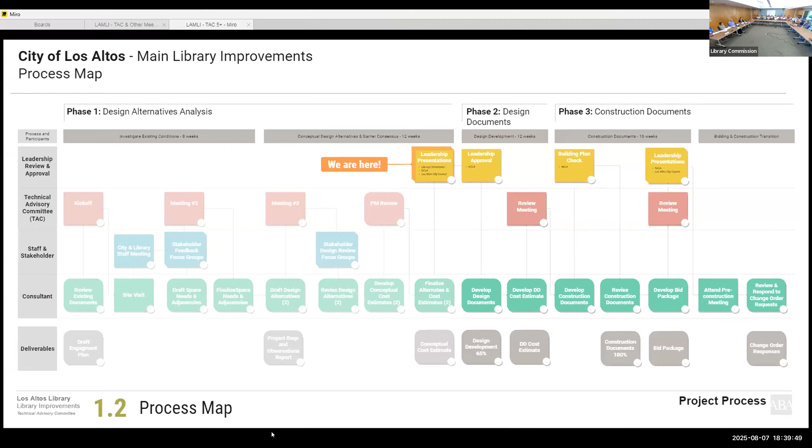This is another way to show that same process with more of a 30,000-foot view. This is our process map that we shared last time, just showing where we are in the process. I don't expect everybody to read all the text on that slide. This is strictly indicating that we're getting to a point where we're looking to conclude the first phase, which is a conceptual design phase, and then start to look ahead into phase 2 and 3, which would establish additional detail behind the design. So that's where we are tonight, on that yellow box at the top.

So let's jump now to the next. And I think we're going to talk about the additional outreach and input we received. You want to walk us through? Okay, good evening everybody, can you hear me? Do I have it close enough? Yeah, right, I'm gonna do this.

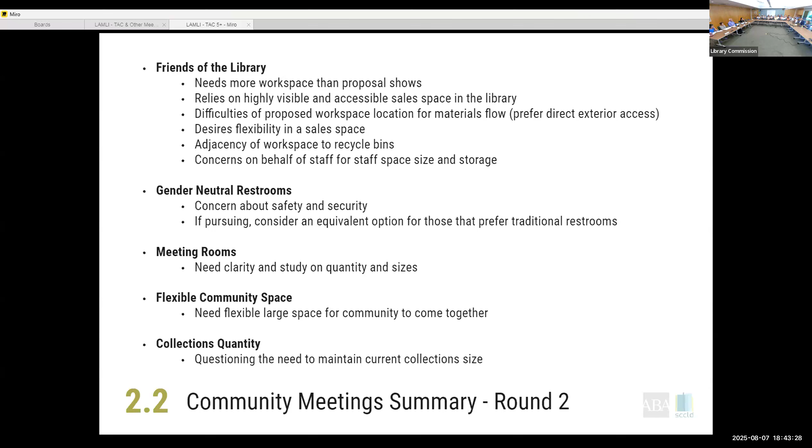If I may pause just for a second. Commissioner Carter, are you able to hear? Okay, just make sure you can. Can you hear me? Bring it closer, I feel like I'm really loud. It's okay. No, sorry to interrupt you. I just want to make sure everybody can hear.

Continuing on staff workspace, we went over this with the library supervisors to really get their feedback, because we didn't go over that with the rest of the community. We reviewed 3 different layout options for staff and received input from multiple voices, including the children's librarian, supervisor, and supervising librarian for adult and teen services. We reviewed the automated materials handling machine, which is when you put your books in the return and that machine takes them back into the workspace. We also covered their workflow and circulation, staff lounge and restrooms, quantity of offices needed, sizes and quantities of workstations, individual task space, group space for tasks and working together on projects, layout and sorting space, and cart and storage requirements.

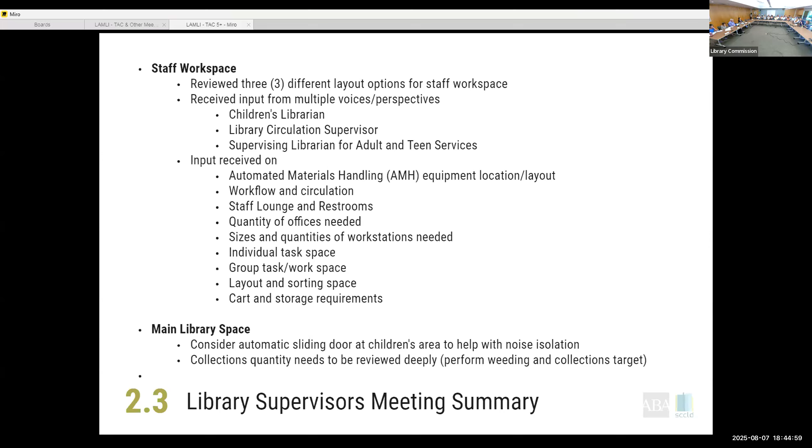We went through a couple of iterations, reviewed them with the library team, and came to the conclusion of what you'll see in the plans tonight. We also talked about main library space, considering automated sliding doors in the children's area to help with noise, and talked about collections quantity needing to be reviewed, performing some weeding and collections targets.

So this is a really high level summary of what we heard when we did the community outreach session out here in the main area of the library.

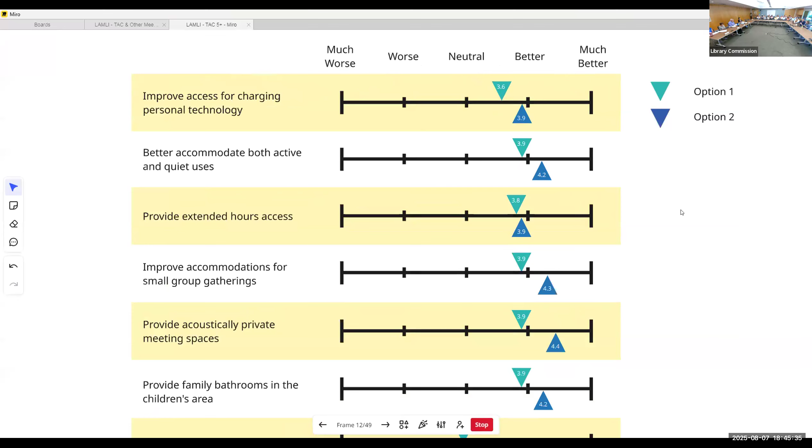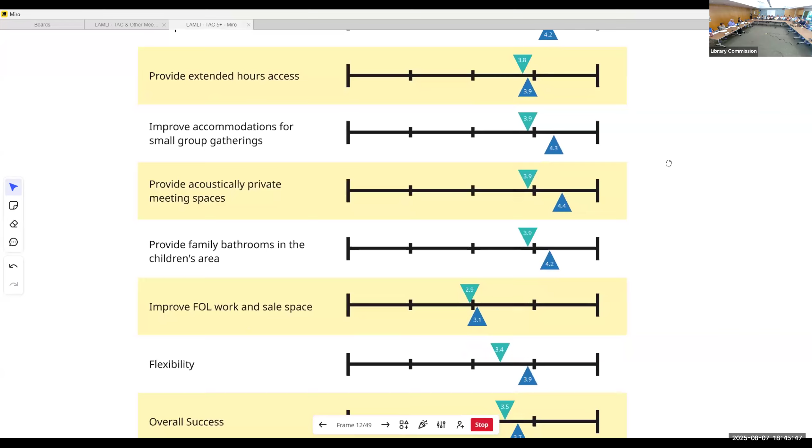I can't super duper multitask, so what you'll notice is option 1 is noted in the teal color, and option 2 is noted in the blue color. We showed 2 different options when we talked with the community, and you can see basically how they scored. They're very, very similar, with most of them on the neutral to better or much better side. The only one that was below that was the Friends of the Library work and sale space. You can see where all of those landed from the community, based on what we heard.

Sorry, is there a sound? Yeah, I was trying to turn the volume up. Now I feel like I heard it change. Yeah, okay. No, so what should it— lower? Yeah, you're hearing an echo. Yeah, just this microphone noise. Let me turn it, yeah.

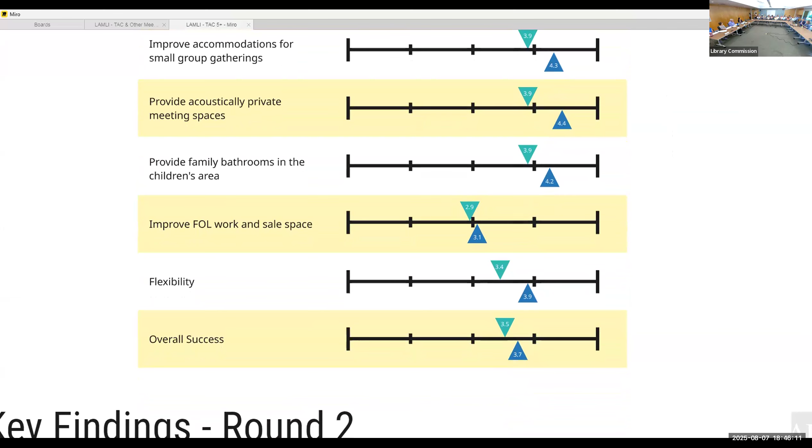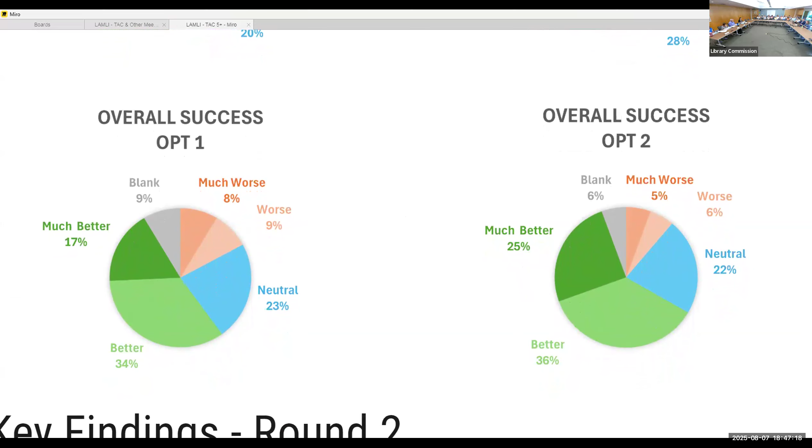And then overall success for option 1 and option 2: you can see that in option 1, at least half of the respondents said it was either much better or better, and a pretty large chunk said it was neutral. In option 2, an even larger amount of people said it was much better or better, with a pretty large chunk being neutral. So in general, these are pretty positive responses to both of the options we shared in that public outreach.

Okay, we take all of that information that we hear from everybody, all those Post-it notes, we group them together by topics, and we picked a couple of the comments that cover across the board to share in the meetings that we've had with the TAC and with you. So there was both support for shared non-gendered restrooms and there was opposition to it.

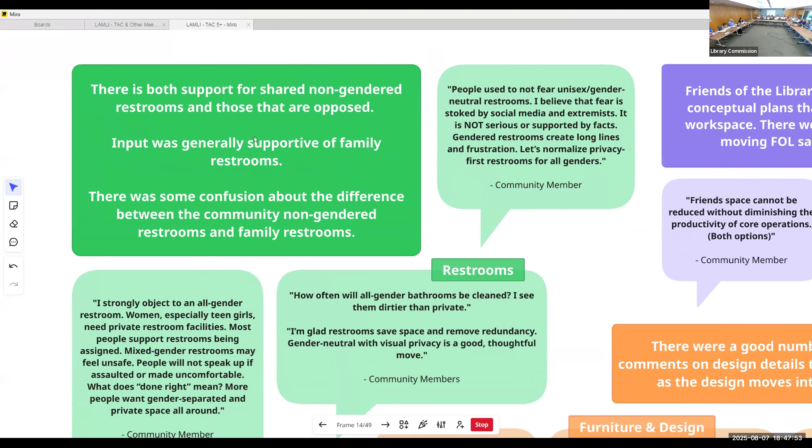Input was generally supportive of family restrooms. There was some confusion about the difference between the community non-gendered restrooms and family restrooms and what each of those meant. I'm not going to read all of these comments for you guys because you were able to look at this ahead of time. You can also go back and look at it afterwards.

And then there were a good number of community comments on design details that we're not yet considering because we're not into that phase, but we definitely heard all of this from everybody and we've got that information cataloged so that as we move into the next phase of design, we can go back and look at these and consider these comments.

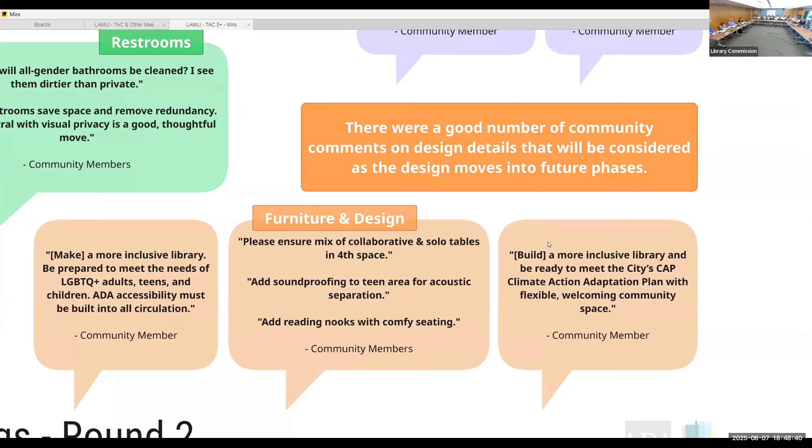And then lastly, there was a little bit of confusion, I think, about the passport office being in the library. I have a feeling some people didn't know that it exists there now and might have thought we were adding it versus just relocating it.

Support was mixed regarding the extended hours space, with some concerns about wasted space, and others wanted to be sure that it's welcoming for people to gather and interact and should even be larger than was proposed. And there was an appreciation for providing quiet study and meeting rooms, while others that don't use something like that didn't think it was necessary.

And then you can see there were some comments about the design, including the dividing wall, and there were some comments about the meeting spaces that were both positive and that didn't think it was necessary.

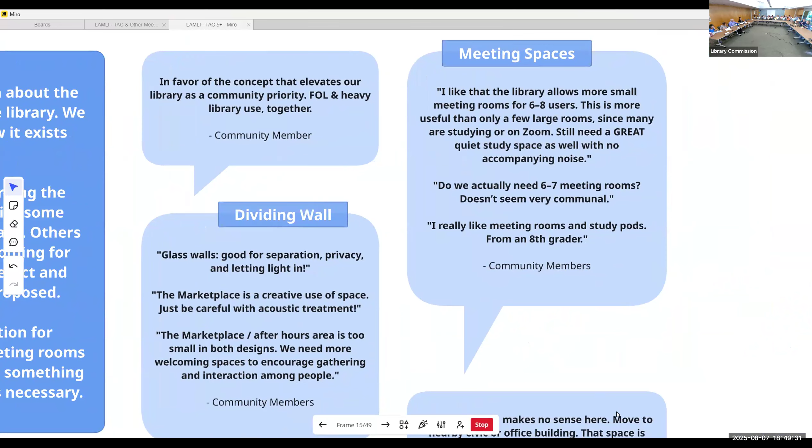And yeah, the passport office makes no sense here. So again, you can go through and read these comments on your own. I'm not going to take up all of our time to read all of those to you, but that's a synopsis of what we heard from the community.

So, to remind us. Yeah, I can do this part. So,

One of the things coming out of that additional input, I want to acknowledge that it's very difficult to convey all of the input that we received on a few slides, right? So Amy just went through the highlights, and one of our jobs is to try to pull out the things from a huge array of input and really pull out the key themes. And so that's what Amy just reviewed with you all. In addition to the key themes, there are design goals.

These goals were the same goals we reviewed last time when we were here, so these should look familiar if you recall. But again, when we talk about design, we can judge design based on a set of criteria. So design is successful only if it hits the goals that we're trying to achieve. These are the goals that we had set out through the input we received. And as we go through the final conceptual design draft today, these are the goals that I want everybody to keep in mind as we look at these plans and renderings. So I won't necessarily read all of them, but I just wanted to give that context again.

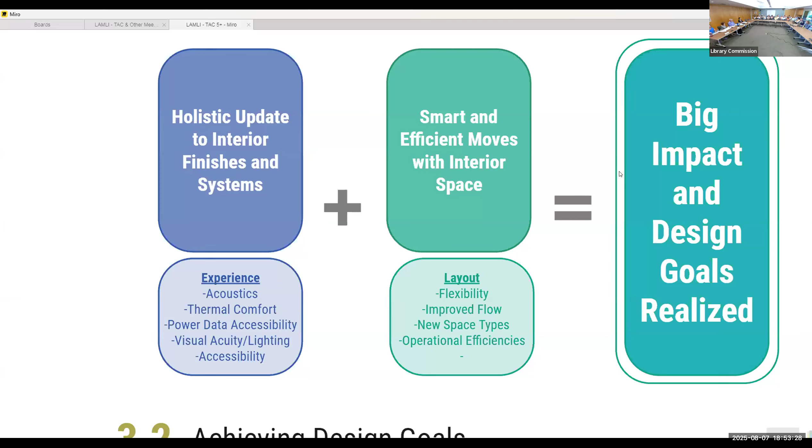So what you see on paper is one thing, but there's a lot behind that. I wanted to point out that these two things combined result in big impact and in the design goals being realized. So with that context, let's jump to the next slide.

One of the things I'll speak to is that you have an incredible building here. We need to understand deeply how this building is performing and where it's falling short. So when we started this process, we did what we call a facility assessment. This assessment is important because it provides the foundation for everything that we do, and we wanted to review some of the key takeaways from it this evening.

This assessment really allows us as a design team, and there's a whole lot of people behind Amy and I here tonight, to look at ways to improve all of those things I mentioned, down to the mechanical units, looking at full electrification of the building. There's a lot of components to this.

Some of the key takeaways of your building, of your space, are that this building has great structural bones. Structurally, there's nothing wrong with this building. That's a key indicator that this is a prime opportunity to renovate and improve what's here, because the bones are good.

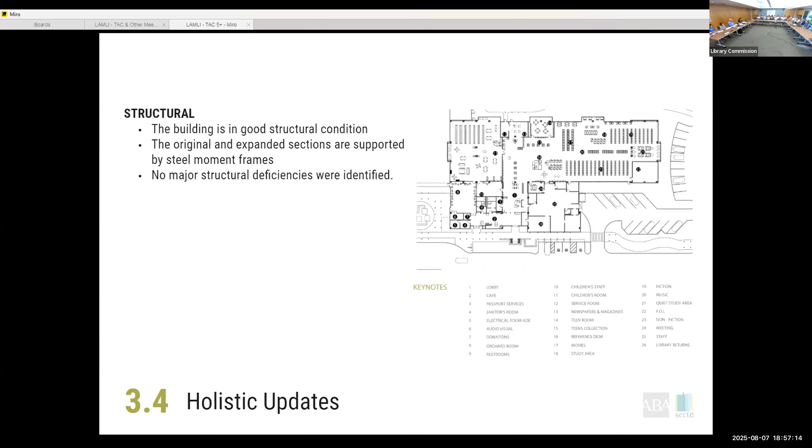Let's talk about mechanical and plumbing quickly. Many of us never see the guts of the building, but the guts are what give you the great thermal experience, the acoustical experience, and many other things. You have existing HVAC and plumbing systems that are functioning but aging, as I mentioned. Several mechanical components, such as the chilled and hot water pumps, are near the end of their life, so these are systems prime for consideration to replace as part of this upgrade.

So you can see here some photos. If any of you have been to the mechanical yard, just right behind the children's area here, these are some of the photos from that yard. Our engineering team went out there, opened things up, and looked at this to understand how it's functioning.

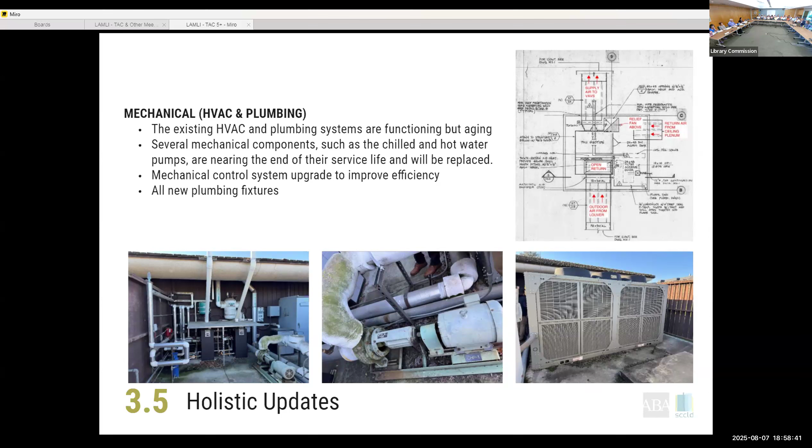The plumbing fixtures are also in need of some update, along with the control system. In today's world, there are a lot of controls inside these systems that allow us to integrate lighting, HVAC, and other things to achieve the best energy performance we can. Right now, your controls are lacking, so that's going to be another component of this.

Electrical is comprised of lighting, power, and to a certain extent, data backbone and telecom. Right now, you need better lighting that's more highly efficient, along with lighting controls to go with that. In addition, especially with today's generations, people go where the power is. So there's a definite need to look at how power can be provided more flexibly throughout the space. That's another key element here.

And then there are life safety issues—egress lighting, fire alarm safety devices that need upgrades. These components are really critical in the case of an emergency, to have these functioning. This is all part of what we'd be doing as this improvement moves forward, improving all these systems.

Electrification is a big topic, something we as designers are constantly grappling with in all of our work. There's sometimes an initial cost to electrification, but with the latest codes and the way things are trending, there's a big push to move away from natural gas. We've considered that as part of this project, and we've looked at ways to fully electrify this building and account for the costs of doing that. We'll go through that later in more detail, but I wanted to mention it as another component of what we're thinking about.

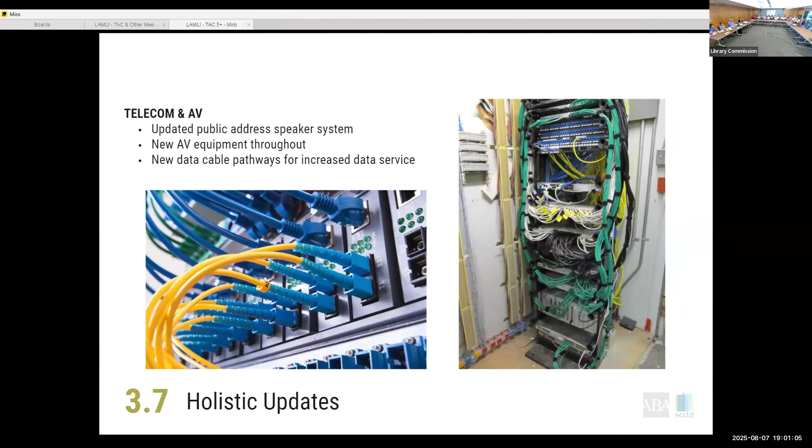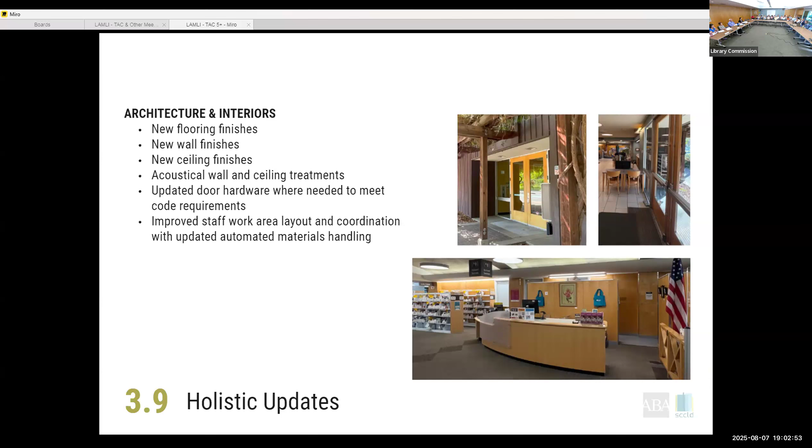Lastly, architecture and interiors. This is a big category because it includes all the things you all get to experience visually and get to touch and interact with—the materials, the finishes, the ceiling treatments, the doors, the hardware. All of these things are really important. We're going to be taking cues on how to do these things based on the current architecture you have. You have a building designed by a Bay tradition architect, Ernest Kump, and there's a lot of history behind this building. So when we select finishes and look at ways to solve the interior details, we'll be taking cues from the heritage of this building, if that makes sense.

With that, I'm going to hand this over to Amy. This is your existing floor plan of the building. To orient everybody, Amy, can you draw a circle where we're sitting right now? So we're in the community room. Many of you are very familiar with this building, so I probably don't need to tell you where we are, but we're about to go through a design that looks to improve this existing condition. I want everybody to see what it looks like today from a bird's eye view, and Amy's going to walk us through how we're looking to improve the layout and functionality of your space.

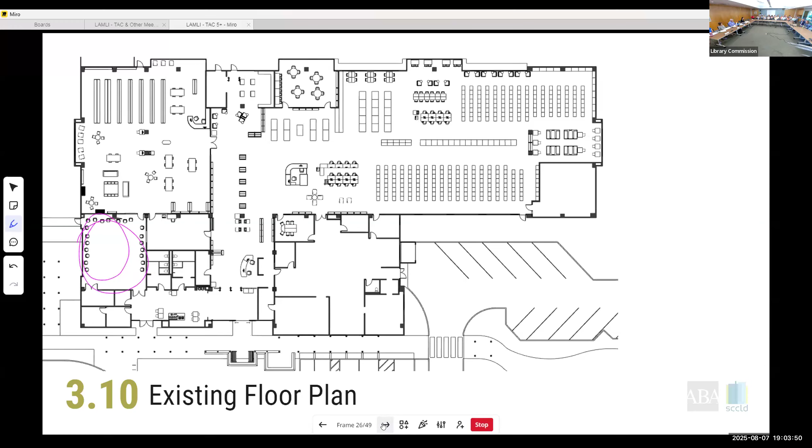So I know there's a lot on this slide.

So it should look pretty familiar to you all. There's a lot that is similar, but there are some key differences you will notice that are based on the feedback we got from all of you and from the community. So I will go through this with you.

Again, here's your entrances. This is your main entrance from parking out front. We're right here in the community room, and this is the entrance that comes off of the orchard. So key design elements: we still have the full height glass wall that divides the active areas and the quiet areas of the library. This thing is a workhorse. It's going to do a lot for us in the space to answer some of the needs that we heard about.

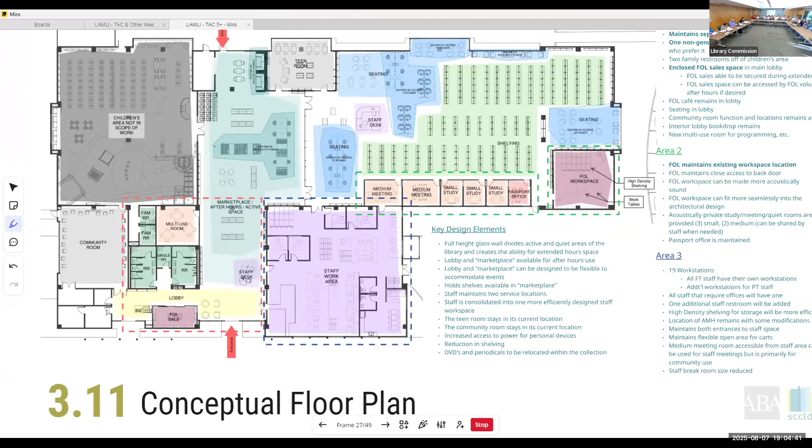I'm just reading from that, so I don't want to lose it. That's going to create a lobby and marketplace. I know there was some concern about that name. It's a common term used in library design, so don't think of it as a retail space. It's just a common word used in library design.

That marketplace is available for after hours use and extended hours use, and it can be designed to be flexible to accommodate different types of events. We have not designed the furniture for this space yet. Remember, we're looking at this as a conceptual design, so the furniture is not set. But in future phases of the project that Jason showed you earlier, the furniture comes later, and we can work with the library, the district, and the city to come up with furniture that's as flexible as needed. Holds shelves are available in the marketplace.

Staff maintains 2 service locations as they do now. Staff is consolidated into a single area that is more efficiently designed. That staff workspace is this big purple area. The teen room stays in its current location. The community room stays in its current location. There will be increased access to power for personal devices, which Jason talked about briefly. There is a plan for a reduction in shelving. That reduction has not been decided on yet, but there is going to be some reduction.

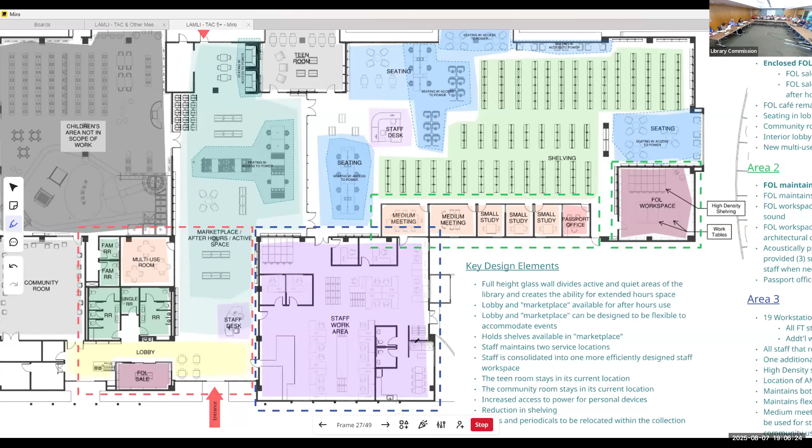Over here so I can see. So we've got this broken up into some areas where there were a lot of key comments. The first area is circled, or has a dashed red line around it. This is sort of the restroom core, what we might call it. It includes the lobby space right as you walk in that door, the restrooms, family restrooms accessible just from the children's area, and a new space you'll notice called a multi-use room.

I'm going to try to get this maximized so I can read that and you guys can see it. So we do maintain separate men's and women's restrooms here in this plan. There is one non-gendered single restroom off of the main lobby for those who prefer it.

That way we can zoom in. And then we do have the 2 family restrooms off of the children's area here. There's some lag with the screen, for some reason it doesn't catch up. There we go. So yeah, 2 family restrooms here.

And then you'll notice here in the lobby is the Friends of the Library sales space in an enclosed space. We'll show you some 3D images later of how that could potentially look. Remember, we're conceptual right now. So it allows for that space to be secured during extended hours. It could also be accessed by Friends of the Library volunteers after hours if desired.

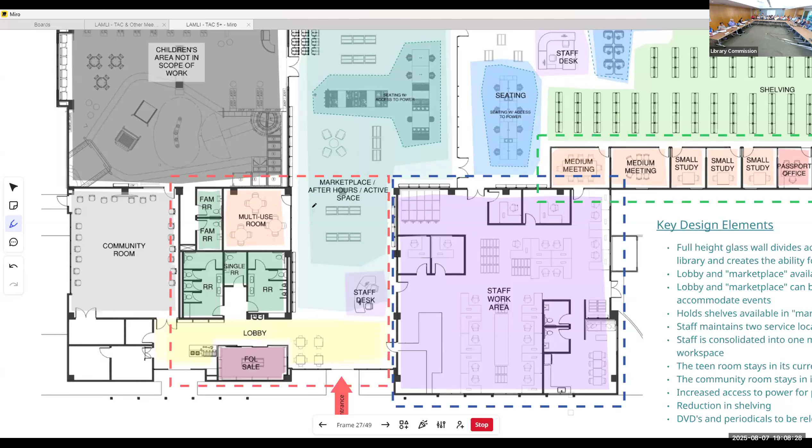The cafe remains in the lobby. There is still seating in the lobby because we know that is used every day by caregivers. Community room function and location remains as is. The interior lobby book drop remains, and there is this new multi-use room that can be used by staff, by library guests, and can be booked in advance. It's a really versatile room, kind of a workhorse.

So then here in this green section, it includes this area here, the Friends of the Library workspace. Give it one second, sorry, it has to transition to catch up.

We heard a lot that the preference would be, at least if not to make the Friends of the Library workspace smaller, to do no harm and keep it at least in the location it is in. So it is still in its current location. The size and shape is a little bit different. We'll talk about this later, in order for it to work well with the architecture and the hip that is in the ceiling, but you can see it is roughly about the same size.

It maintains the access to the back door that you have now. We can make it more acoustically sound so that you guys can talk at a normal level in there, and people sitting out here in the quiet area aren't disturbed. Again, it can fit more seamlessly into the architecture.

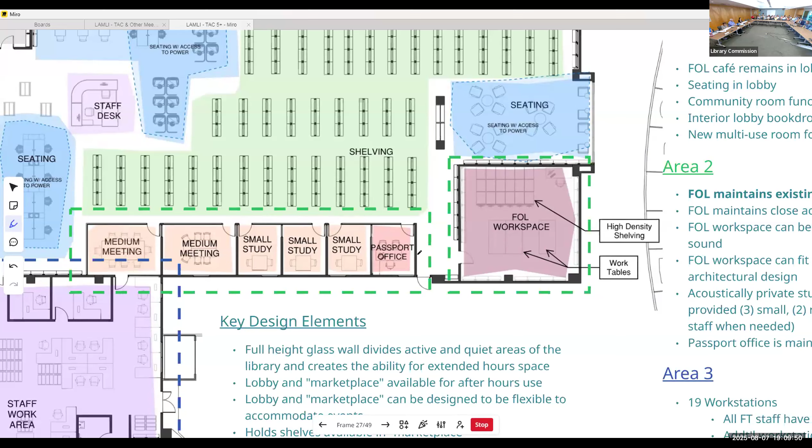We also have this row of small study rooms and/or meeting rooms. There are 3 small ones and 2 medium ones. One nice thing is that this one can be used by staff directly from the staff room. And again, we maintain the passport office.

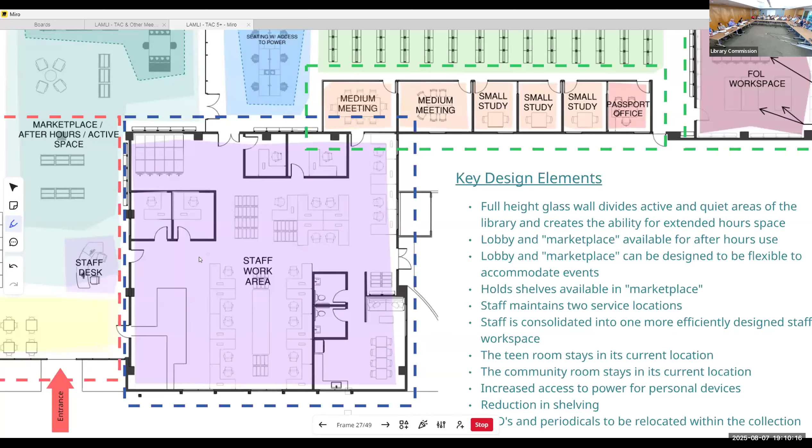Area 3 is the staff room, which most of you won't experience, but you should be aware of the improvements we've made there. We've maintained 19 workstations, which is what we were told is required. All full-time staff have their own workstations, with additional workstations for part-time staff. Everybody that requires an office will have one, nobody has to share. One thing we heard from staff is that they would really like a second restroom, which we were able to accommodate.

We are utilizing high-density shelving for storage in this plan, which makes it a lot more efficient, and that was really well received by the library staff.

The location of the AMH remains with some modifications, so there shouldn't be any changes to where the book drops are, on the interior or exterior of the building. They still maintain 2 entrances to their staff space, and they have a flexible open area for carts. Again, they have that meeting room they can access from the staff area when needed. Their staff break room size has been reduced but the functions remain, and they got that extra restroom. So that's a lot of information quickly, but you guys have seen this before, so it shouldn't be completely new.

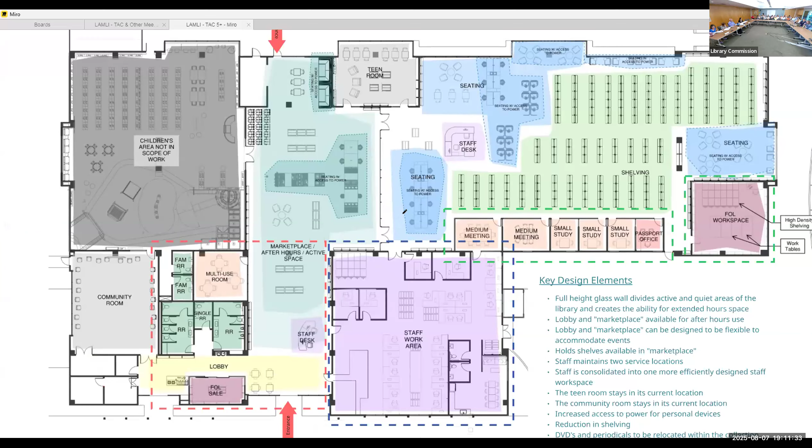I'll just highlight real quick, the green area shows the shelving. We're going to talk about the shelving in a bit on another slide. Go ahead to the next one.

I wanted to talk briefly about some potential flexibility for the marketplace. Right now you're seeing it here with larger furniture that allows for power access, where it's drawn from one location but stretched out so more people can access power from one piece of furniture. That's something that would not be as flexible and wouldn't move around as easily.

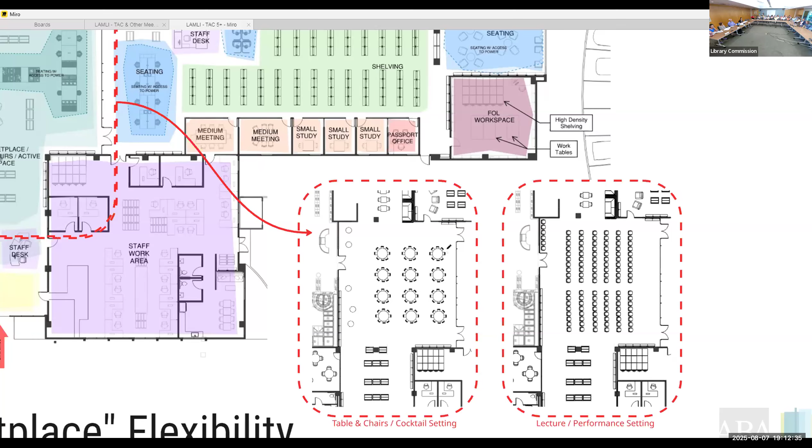Again, furniture is going to come down the road in another phase. We can design this to be as flexible as possible, so furniture can move out of the way. You could set it up for, say, a performance, a poetry reading, or a guest lecture. So there's the ability to use this space almost like you would use the community room, allowing for additional flexible space within the library. Those are just a couple of ways it could be set up.

If I may, I just wanted to add two quick items. I'm going to go back one step.

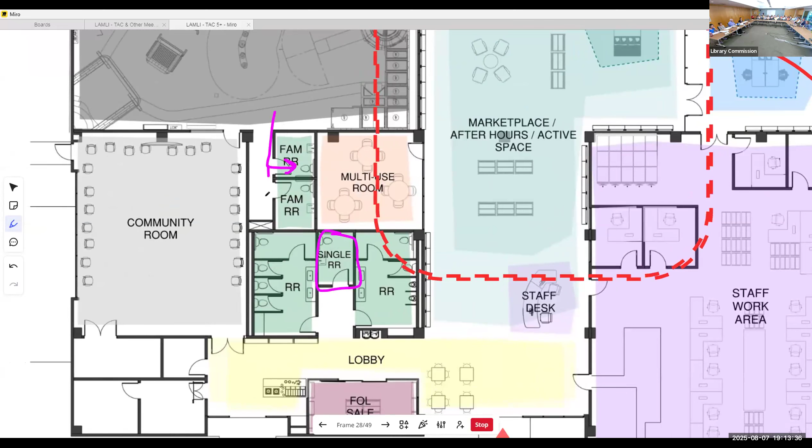That's okay, that works. I think the big takeaways here are restrooms. I wanted to point out on this plan, these are gendered restrooms, male and female. We also have the option, in the spot between the two restrooms, to consider a single unit restroom that could be considered all-gender, since you'd have one occupant, male or female. We also have the two family restrooms. So from a restroom perspective, this is a much different plan than what you saw last time. I just wanted to point out the big changes real quick.

This is a significant change from where we were. We've coordinated closely with the team developing the improvements for the children's space. You guys have a great children's improvements plan happening right now across the system, and we've been coordinating with that team so we can include access directly from children's to the family restrooms. We have two family restrooms, which I think will be a nice amenity.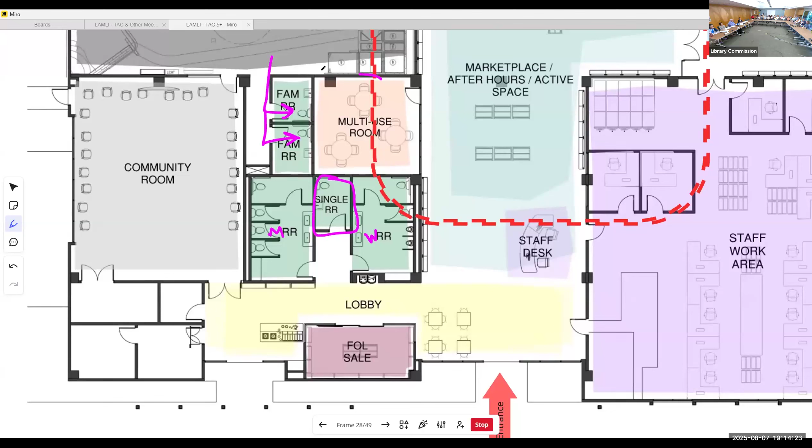I wanted to point out one other thing about this plan, the multi-use room. Amy mentioned this—we heard last time that we don't just need small meeting spaces, we need a variety of meeting spaces, and we need to be smart about how many we have, since you have great amenities at the community center too for meeting space. The multi-use room becomes what I'll call a large flexible meeting space, and then you have two mediums and a few smalls. So we were able to look at a variety without heavily impacting collections and other aspects of the library space. The last thing I wanted to point out on the plan, if you could zoom all the way out.

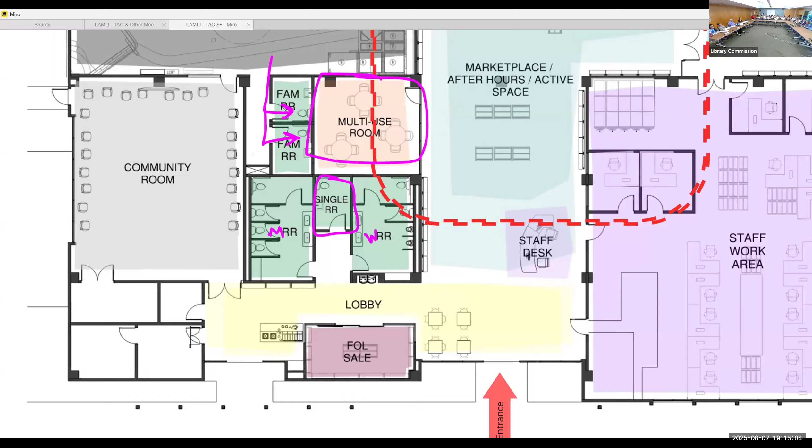For the workspace, you all know, I know there's many Friends members here tonight, that workspace is where you currently work out of. We had an opportunity to go see on a couple of occasions how that process works on a day-to-day basis. And we also know there's the sales component of what you do, which is very important. So this gets us the same amount of space you have now, but we're able to acoustically separate it. We'll show you in a view how that works, because respecting the architecture and the interior space is important. Right now, the Friends of the Library workspace has partial height walls and a big brace that isn't complementary to the space, and it also doesn't provide acoustical separation.

I'll pause for a second, Amy, if you have anything else. Thank you. I wanted to add that right now we're showing a conceptual idea for how this could be set up.

Obviously, in the future it can change, but we thought something that might be beneficial for the Friends of the Library workspace is to also use high density shelving in there, so it takes up less square footage. You may be able to fit more on your shelves when you have your holiday collections and things you just need to store but don't need to access. That could be part of this high density shelving.

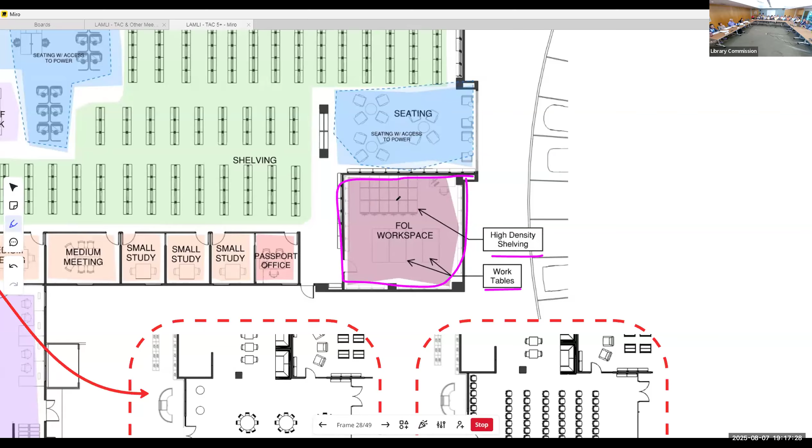So again, we've got shelves along this wall, shelves tucked in here, shelves here, and then we're showing this high density shelving here as well with these workspaces in the center. So just so you know, we've thought about this. There's obviously more work to come to make sure it functions well, but we wanted you to understand that this is high density shelving here so that's clear.

Okay, so we're going to look at some conceptual renderings. I want to remind you that they are conceptual, to help you get a better understanding of the proposed floor plan design. It drops you right into the space so you can see it at an eye level view. It's not intended to be realistic—we haven't picked carpet, we haven't picked the colors of things, any of that. So it's very neutral, gray and wood tones right now, because it's really just showing you the overall layout and the form of this.

You already have an incredible space, originally designed by an architect, that has a very strong tradition. So as we look forward to the design and selecting materiality, those decisions will be based on respecting that. What you're going to see in the renderings is more about showing you the spatial quality in terms of volume, extents, and boundaries—what's solid, what's not. It's not about that wall having wood on it or that wall having purple paint on it; that comes in the design phases I showed you before, down the road. Right now, we want to communicate the overall feeling of these spaces in terms of the volume of the space.

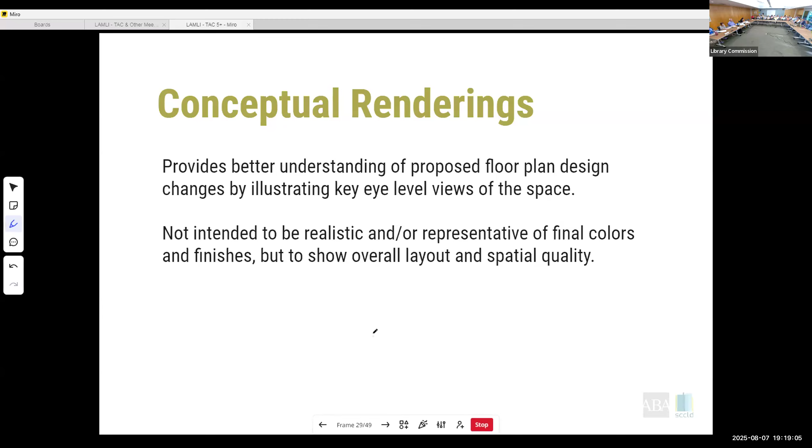Okay, so this one is mostly the same from what you guys have seen before. Down in the right here, we've got this key plan that shows you a perspective of where you're looking at it from. So you've come through the lobby, through one of those doors, and you're looking sort of towards where the teen space is, and through the big glass wall towards the quiet areas. So your perspective is in the active area of the library.

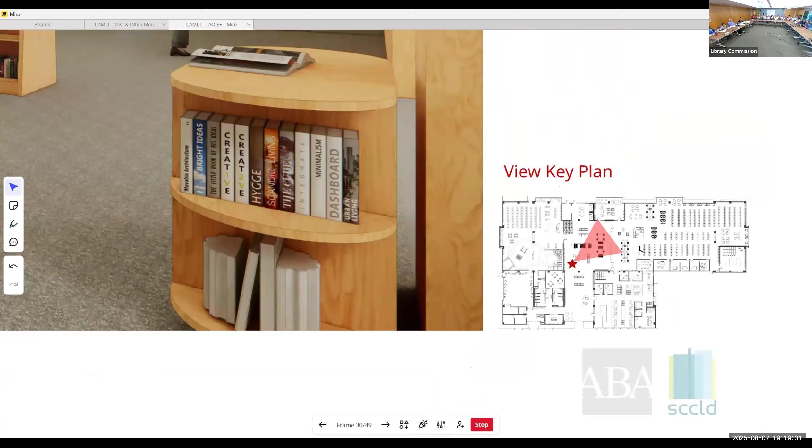So, see the image. It's really just, sorry.

Yeah, so here you're seeing the top of that glass wall that goes all the way across. The goal is to have this feel as transparent and open as we can. We did hear that there's some concern about people running into the wall, so there's always the opportunity to add some kind of a film or something to it.

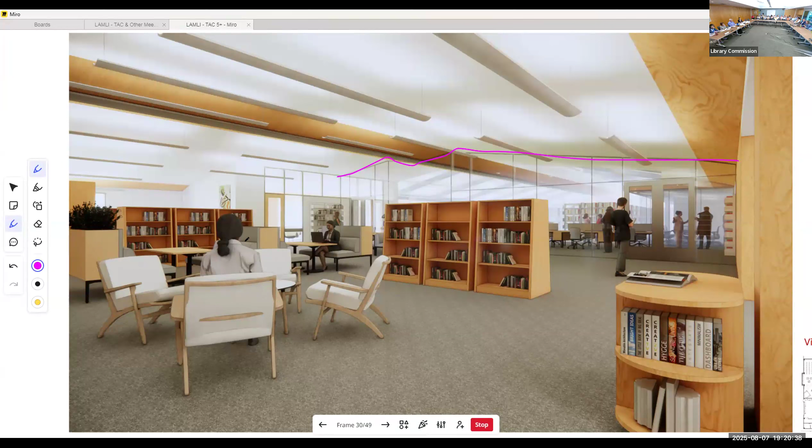Another thing you're seeing here is some modifications to the teens room where we dropped in a solid wall, but we're keeping as much glass as possible in order to increase the functionality of the teens room, where we can either put shelving inside that wall or their gaming screen, something along those lines. Again, more work to come in the future, but you're seeing a mix of seating, this long piece here that has access to power, while still maintaining shelving in this area.

This is just like we've taken a step towards the door that exits out here to the orchard. So you're standing kind of close to the entrance to the children's space and looking back again into the quiet space, very similar to what we were looking at before, just a slightly different perspective.

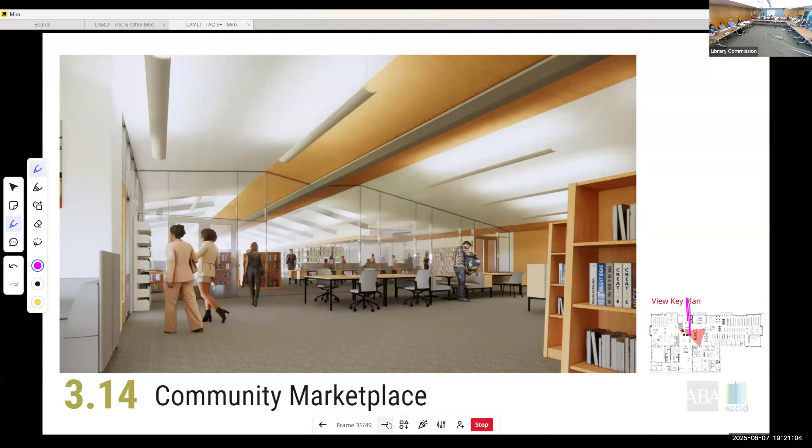Now we've gone inside the quiet area of the library. So you've gone through these doors and you're standing back here looking out towards the active area of the library. Again, we're seeing a piece of furniture here that can allow many people to sit down and have access to power. Furniture is coming later, so we'll get into the weeds of that in future phases of the project. But here's this glass wall, and here's the teens area over here, just for orienting yourself to this view.

If I may, I just wanted to point out here, in these last couple of views, you'll notice the central spine of the building that you're very familiar with. There's a beautiful spine in the ceiling that runs all the way through, and we want to continue that, not lose it in what we're doing. So a big part of this idea is that you can still see the continuity of that through the glass, and that provides a feeling of openness and continuity through the space, not cutting it off. Because what we don't want to do is create a renovation that makes the space feel smaller. What we're trying to do is make the space feel as big or bigger through these methods we're talking about.

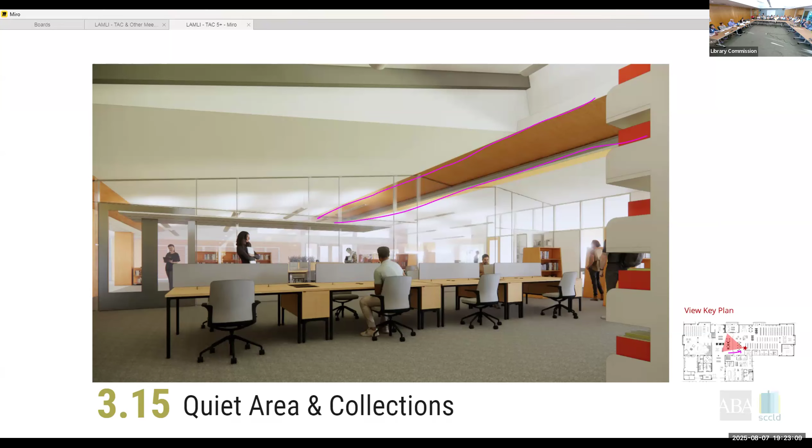I mentioned earlier that this wall is doing a lot for us. It's giving us the quiet area in the library and the active space in the library. It's giving us the ability to have these doors locked and have the extended access on the other side. So it's doing a lot for us. There is a lovely view down the length of the library, and like Jason was saying, we didn't want to block that off. We want it to feel as open as possible, as much like it does now as possible.

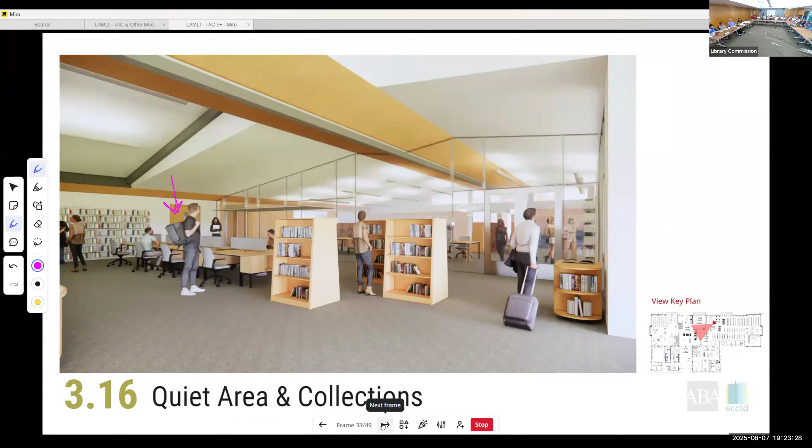So this again is another familiar view. We've just taken a step over a little bit closer to the other side of the library, looking back through that wall towards the active area. This is the entrance to staff right here, I believe. And then this next view will be a new one that you have not seen before.

So this is one way we could handle doing the Friends of the Library sales space in more of a bookstore style. Right now we're showing it, so you're seeing it from this perspective. You are standing where the big red star is, looking back towards it in this direction. Zoom back out and give it a second.

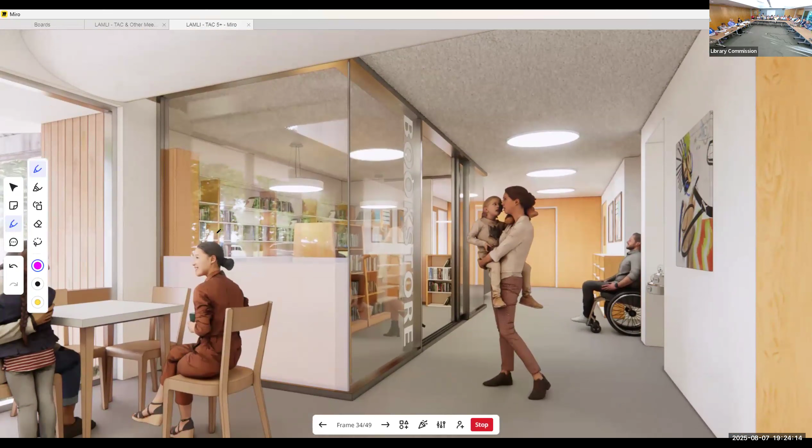Right now it is an enclosed space, but we wanted it to feel as open as possible, so we're currently showing it with glass walls. I know there's going to be a desire to maximize the shelving in there as much as possible, so what we're currently showing is what we call spandrel glass, but there's a section of this that has maybe a film on it so that a bookcase could go against the back, a lower bookcase. You can see one down here. It could be the same condition on this side where there's a lower bookshelf against this wall. We can have some fun with the signage, and we can work with the Friends of the Library to come up with something really interesting and compelling.

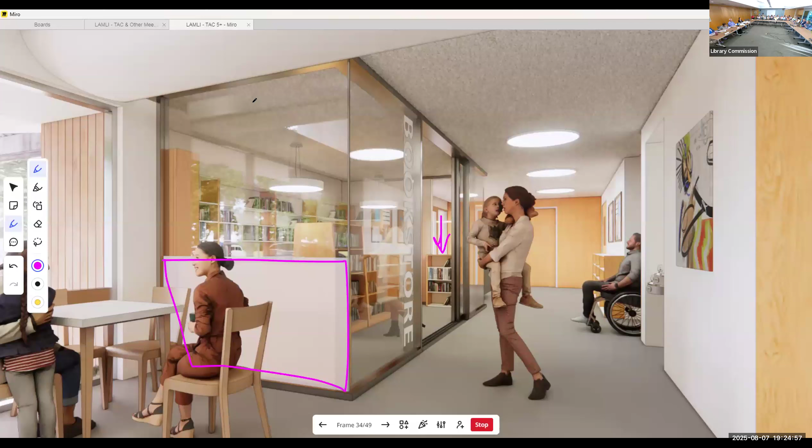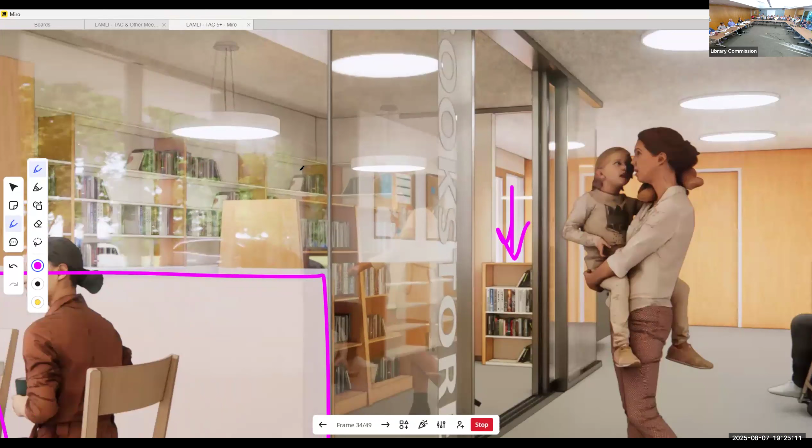And we'll work on lighting and all of that in the future. So this is one way that we could do it, having it feel as open and welcoming as possible. People can see the books, they can see that this is the store, and they can stop in there on their way in and out of the library, on their way to the restroom, on their way to this room.

So that is the proposed Friends of the Library space. I want to show you one other thing just right here, if you can zoom into that, Jason. So right before you come into this room, we played with a couple of different ideas, and in talking with the technical advisory committee, we thought it would be interesting to have a space that is a community board. So those are a couple of maybe bulletin boards or enclosed ones behind glass that allow for community postings. Maybe there's a board that's just for the commission, so the commission can post their own things. And then there's some space for shelving below that for whatever might end up going there, whether it's commission stuff, pamphlets, etc.

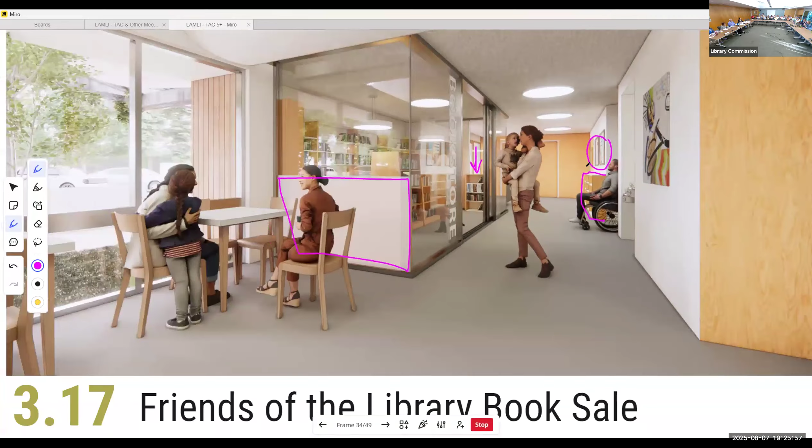So that is the Friends of the Library space in the lobby. I just wanted to point out, back on the plan, I'm going to go back once it catches up, that the consideration of this idea is not just the Friends sales space and creating a space that is for Friends that is closed, but can also feel open. So there are sliding doors that open the entire front portion of the space.

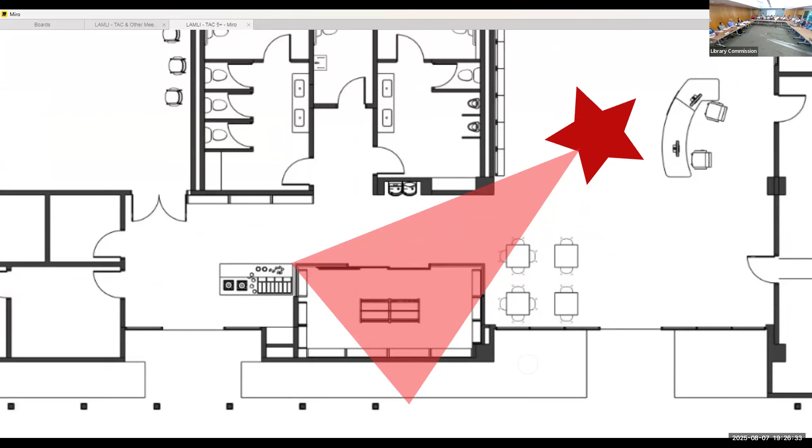And then in addition, there's a synergy here. Now we have sales space with cafe cart. We have created niches inside to either side of the Friends area for additional display and storage for the cafe cart, because that's important as well. And we still have the seating, right at the crux of where everybody's traveling. Whether you're coming in through the Orchard Room entry or the main entry, the Friends Bookstore is right there. So I just wanted to explain some of the thinking behind why it's here and also how it's intended to function.

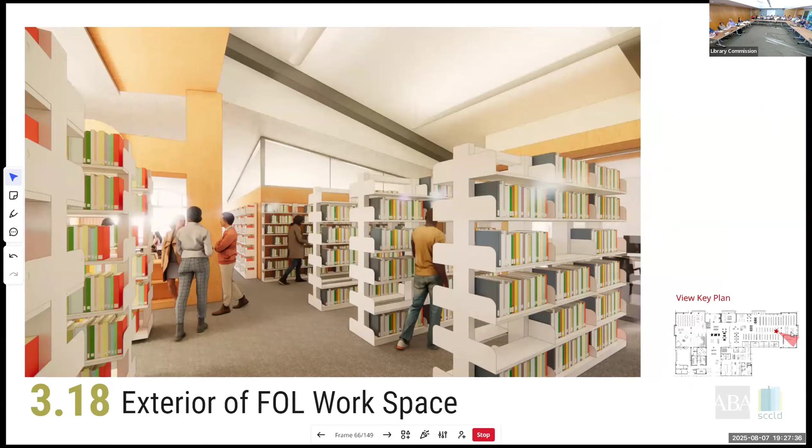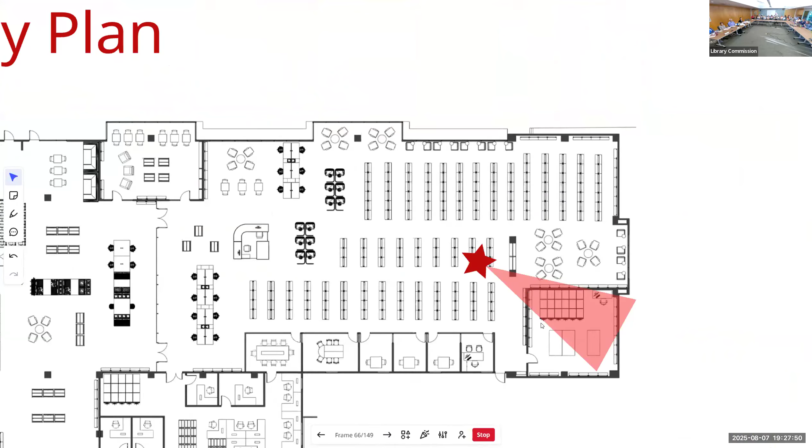Okay, so that's the sales space. Now we're going to jump towards the back of the library where we're looking at the exterior of the workspace. Sorry, I'm zooming, it's just taking a second. So the view that we are looking at is from this general area, looking back towards the workspace. So you'll be able to see here that it feels bright and open.

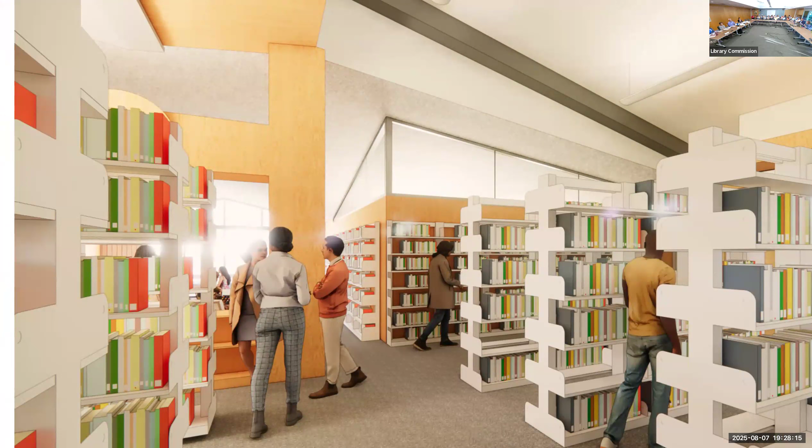Sorry, it's lagging. So there is a glass clearstory above this. So we would make sure that the portion of wall, the solid piece of wall, would be high enough to have shelving on the interior that is useful and gives you as much storage as possible. But in order to have it feel open and feel really part of the architecture and very intentional, we looked at adding the glass above so that it feels more - not ethereal, but we can see the light coming through. You get light coming from the exterior windows, and it doesn't feel like a big block in the center or this corner of the building. That's one view of that.

The door is right over here, so if that helps with orientation. And then this is if you've stepped back into that quiet space that is just outside of that now, adjacent to the windows, looking back towards that.

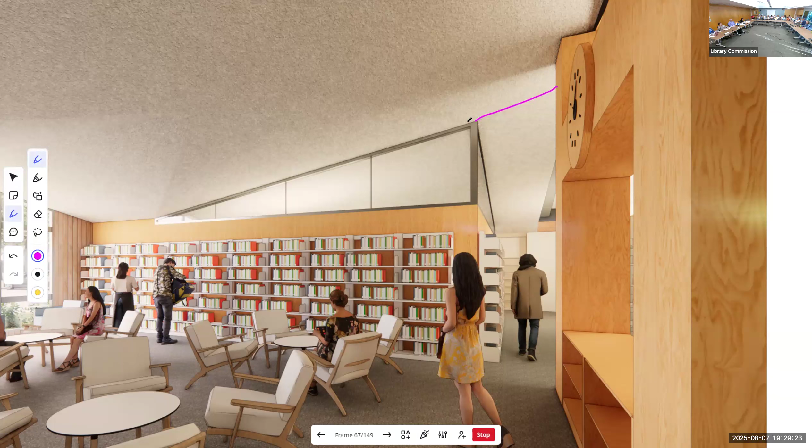So, Jason, do you want to talk a little bit about how the windows are fitting into the shape of the ceiling? Just quickly, because it's a nuance to many people, but again, it's about respecting what is an incredible space that you have. One of the things that we did is - Amy, if you could sketch where the hip is for me, since you're controlling it - thank you. So you have what we call a hip, there's a line, it'll show up in a minute, in the ceiling. And right now, what's below this natural part of the roofline has no relationship to it. So what we did is we massaged the walls of the Friends workspace to align to what's above, so that when we carry this clearstory all the way up, it has a logical and rational point that it hits into that hip. Again, these are subtleties, but things that are important when we're considering respecting the space.

And the beauty of it is that it's still actually an improved proportion to the Friends space. By massaging these walls, we actually kept the same square footage, but just improved the proportion and also improved the intersection of the architecture.

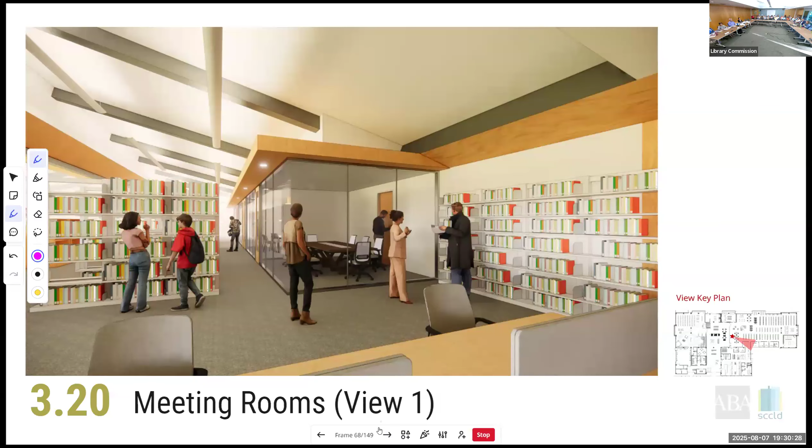So that's something we're always looking at those ideas. This is pretty much the same as what you've all seen before. This is looking at that row of study spaces, meeting rooms, whatever we end up calling them, roughly from this location.

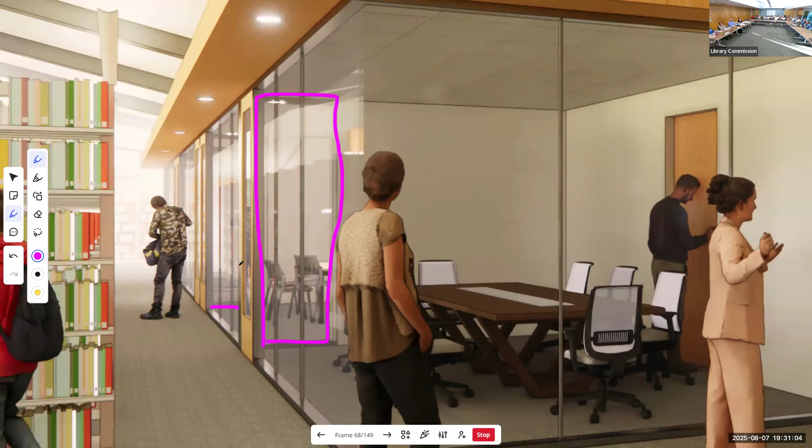They are glass fronted, and what's nice is you can see a bit here in a second where we've given them some glass - the wall doesn't come all the way out to the edge. There's a little sliver of glass between each of these rooms, so as you're looking down this space, you can see through it. It doesn't feel so blocky, doesn't feel like it's cutting the space off quite as much. That's one nice design element you can see happening here.

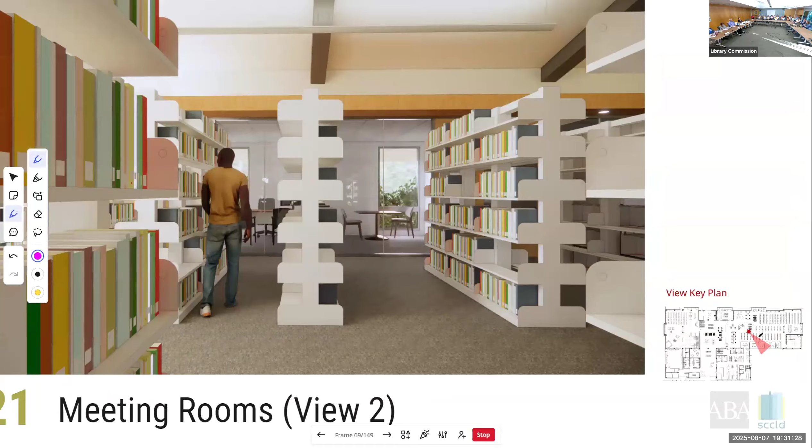But again, this is mostly the same as what you would have seen in our previous presentation. And then we threw in one more view, which has a lot of shelving there, but we wanted you to see from a different direction what that might look like. So you're looking through the shelving. Actually, I think our view is a little bit more here.

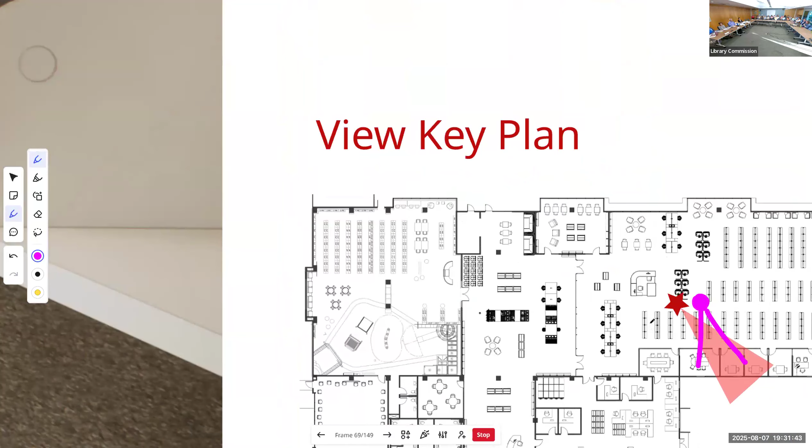Where my red or pink dot is, so we're kind of looking at it more like that - more straight on. So you're looking through the shelving and you're seeing those glass fronted meeting rooms and study rooms with the existing windows that are allowing that natural light to come into the space.

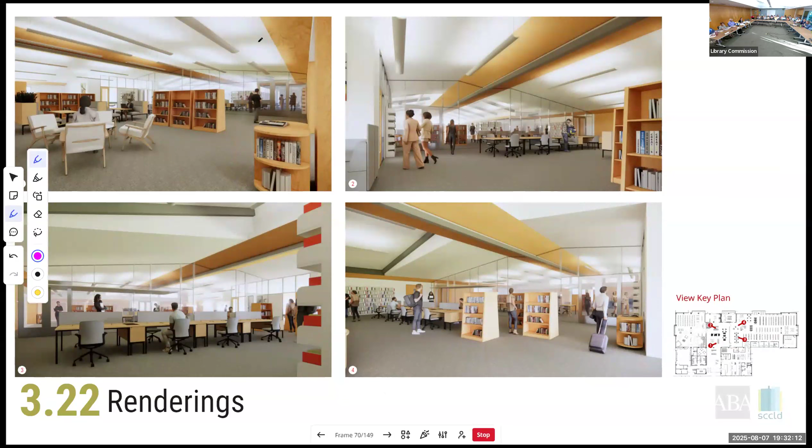So these slides just have all of those views together, so when you look at this on your own, you can compare them to each other. This slide and the next slide are just doing that - the views have not changed, they're the same ones we just looked at. Same thing here, and there is the key plan down here to get you oriented to see where you are standing to look at these views.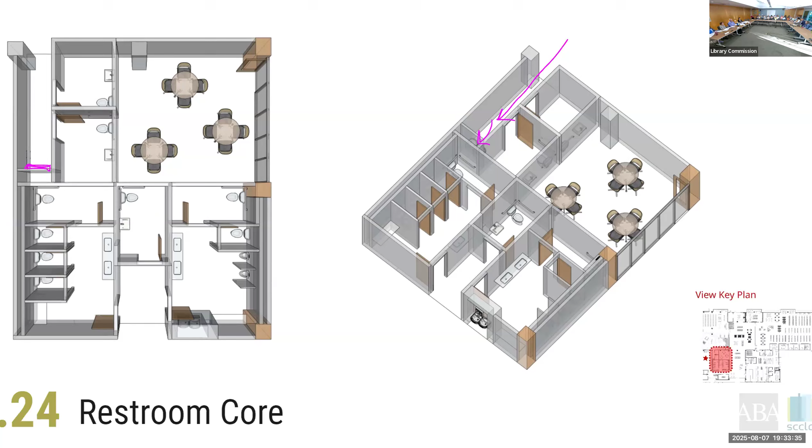One thing I wanted to point out on the restrooms is that the entry is through a foyer or alcove - you come into a central place and then turn into the restroom. This provides a little relief off of the lobby so you're not having doors opening straight out. It also provides privacy and allows us to have that middle single-use restroom in there as well. So when we think about that overall space, we really thought about how to create that relief, a little privacy, a little buffer before you get straight to the restrooms from the lobby, and for sound.

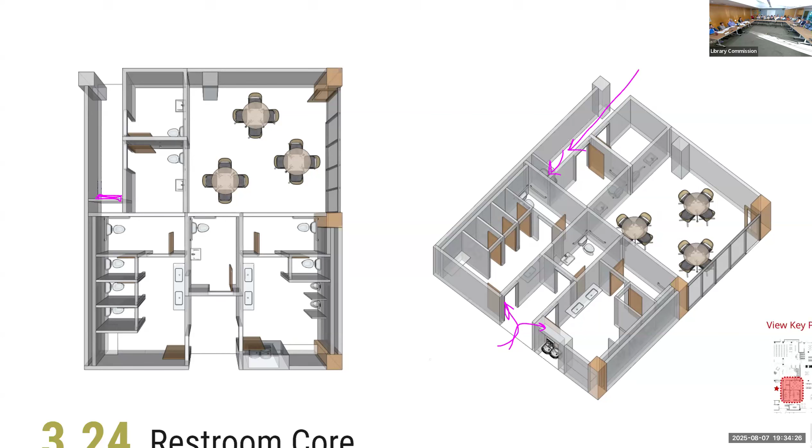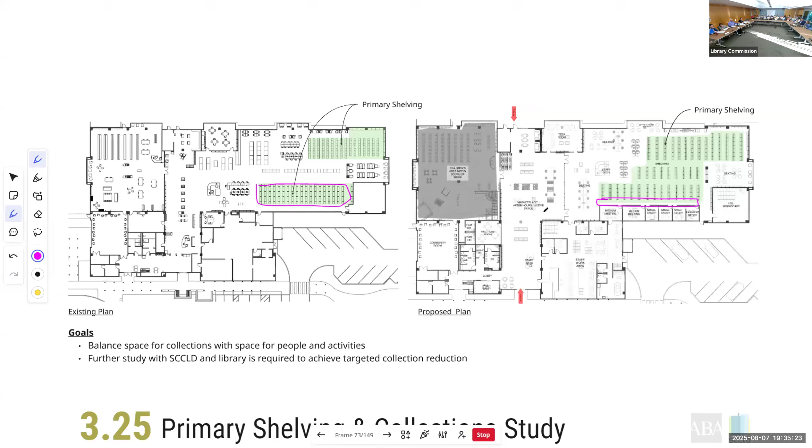So this is just very high level - there's obviously other shelving scattered around the library, but the bulk of it is shown in these green areas, and you can see how that changes a bit in the proposed plan. So this is just a really high level look at that. Obviously we want to make sure we balance space for collections with space for people and activities, making sure we're hitting the right balance. That's a goal we will work on with the TAC.

Okay, on to the next. All right, wrap it up. We wanted to take the time to go through the design. That's the most important part.

So I'm going to jump now to the costs associated with this conceptual design. We could move to the next slide. This slide is really an orientation slide. What this does is tell you about how project costs work.

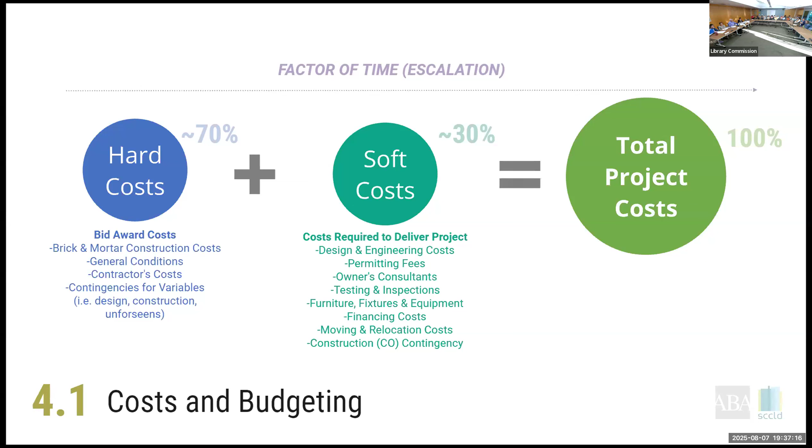As many of you know from your own projects, it's not just the brick and mortar costs of the work, but also what we call soft costs. These are things like engineering costs, permitting fees, consultant costs, testing and inspections, financing potentially. These are important to consider when budgeting for a project. Typically we see a range of about 70% of project costs being brick and mortar, the building, and about 30% being soft costs. This can vary, but it's a general metric to consider as the city and commission look to move forward with the project. We want to make sure we're considering a holistic view of all the costs.

As has been stated a few times, we are not in a place of having a final design. We are in what we call a conceptual phase. When you're in a conceptual phase, you cannot estimate costs. We don't have drawings, we're not taking off lineal footage of every material and finish. We are doing cost modeling, which is done in a similar fashion, using benchmarks and knowing the level of quality we want to imbue into the space. This cost model also includes a lot of contingency for the unknown. Whenever you're working with an existing space, there's going to be things we don't know about until we open them up. So all the costs I'll share factor in those contingencies as well.

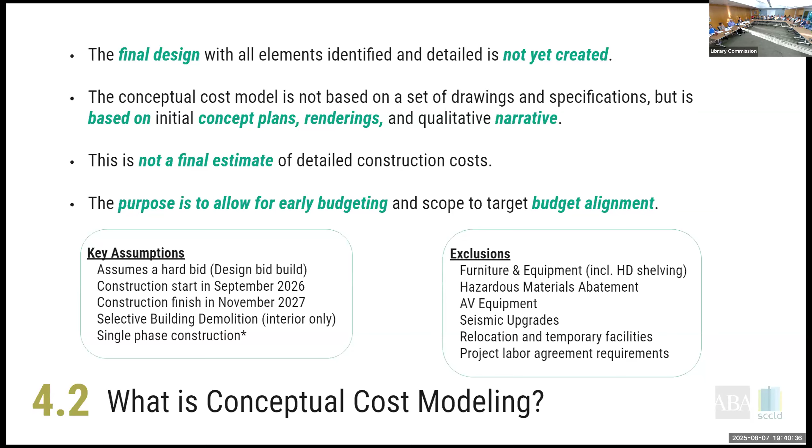The other important factor is that the hard costs of construction I'm going to show you are for single phase construction, meaning all the work is done at one time. That is the most cost-effective way to do the work. However, we fully recognize that further discussion would need to be had with this team and others about potential phasing, especially with the district, because if there's an appetite to have the library not have full downtime, then phasing would need to be considered. We have a slide that will speak to that as well. There are also some exclusions—I'm not going to go through all of these, but they're very typical exclusions in a cost estimate.

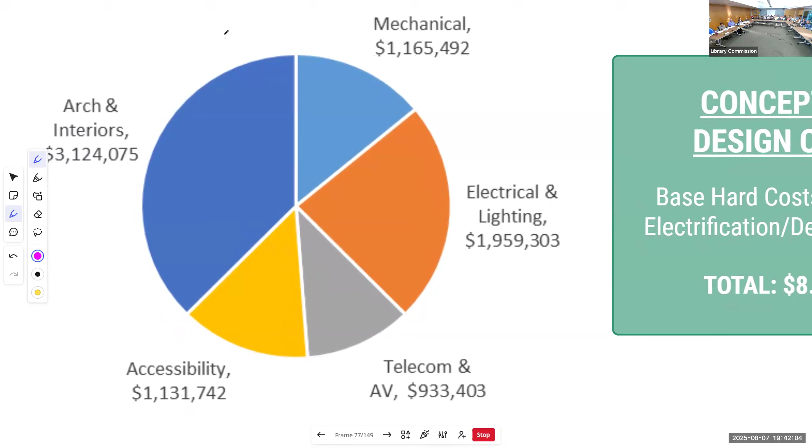If you look at accessibility alone, that's a significant number because right now that includes a lot of the restroom work, and restrooms are not inexpensive. Then you'll see telecom and AV data backbone at around $1 million. And then the interiors and architecture, which is really interiors—we're not affecting anything on the skin of the building—as one of the most significant portions, which is not atypical, because now we're talking about reconfiguring space, all the framing work, all the details that go into that.

So this is a very high level view of the costs for everybody to understand. And of course, the goal moving forward is to understand how we can thread the needle on tuning the design and designing to a budget. So right now, if we were to say this needs to be a $7.5 million hard cost project, making that up, then what we do is we design to that number, and there are ways that we can do that. So right now, based on conceptual work, first pass, this is where we're at with the costs. Go to the next slide.

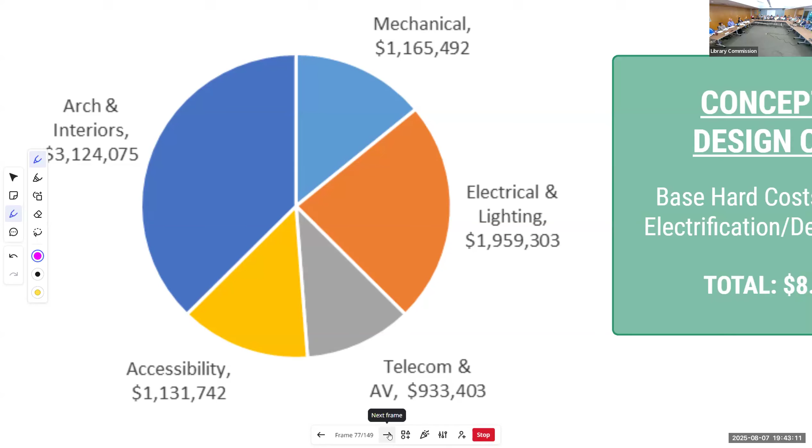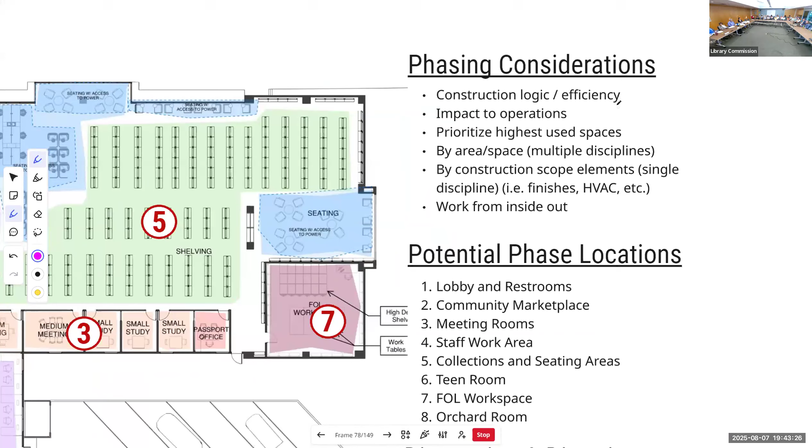I mentioned phasing. I'm not going to go through this in detail, but Amy, if you just zoom in to the right, upper right for a second. If phasing is going to be considered, there's a lot of things to think about. So these two lists, primarily the top one, once it gets there, this is the list of things to think about and how you might phase or what considerations you should make. There are many ways to do this.

And so we are here to help support the city team. If there was a desire to do phasing, how can we do that? What will make the most sense? Because there are ways to do it that are good, and there are ways to do it that are not so good. And essentially, when you phase a project, it takes longer, and time is money. So where we started is the assumption of let's do this in one phase and see what that would look like. And if we wanted to break it into phases, we can explore that as we move forward.

I think that's the main point here. So let's wrap it up.

The short answer is light tubes definitely would be a great solution. We need to look at, right now that spine that runs down the middle is also an important spine for a mechanical system. So the light tubes would want to frame that in the main acoustical popcorn-look ceiling.

On the after hours, it wasn't clear to me how big the area was, because a big part of this on the after hours is the extension of the services, and services equals hours in many cases. So can you show me exactly what area would be after hours? I wasn't sure. Yeah, Amy is going to draw it out for us.

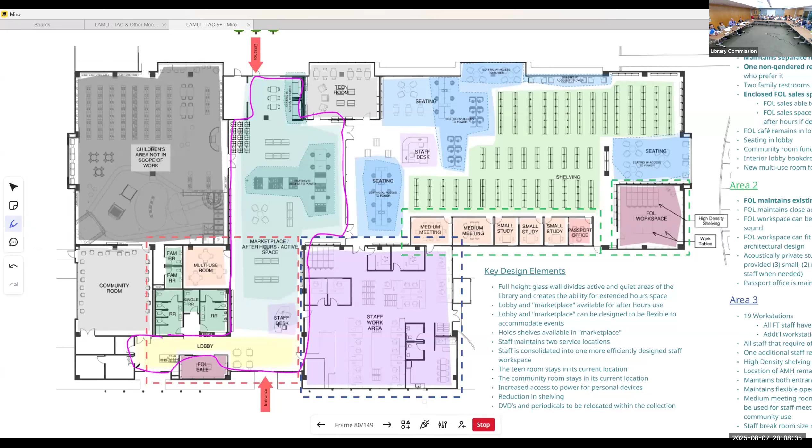Give it a quick second, take a second for it to come up. It's actually working much better than it was. I was confused because I thought it might be only that half part where the dash line is. I didn't know that it took the entire marketplace. Yes, that is all.

The glass wall, how will you prevent our remodel to not heat up like an Apple store at the Stanford Mall? The question is, is the top glass wall necessary? Have you looked at it? Are there any heating issues? Do you have experience in this? Because it's a question that's come up.

The short answer is the reason we carried the glass wall all the way to the top is for acoustic separation. Without it, you lose pretty much all acoustical integrity. If you wanted to have a louder function happening in that community space in the marketplace and still have a quiet side of the library, that would be very challenging if we don't carry it all the way to the top. That's the first part.

To answer the second part, yes, there are ways to, with a new mechanical system, which are part of the cost we've factored in, zone it so that there's a mechanical system dedicated to the quiet side that is individually controlled to provide the right balance of heating and cooling, because the occupant load will be different at times on that side.

Human beings put off plenty of heat, so when you're in the marketplace community space, that unit would be able to control that independently as well to prevent what you were alluding to, which is having a hot box because somebody's adjusting a thermostat on one side and it's affecting the other side of the space.

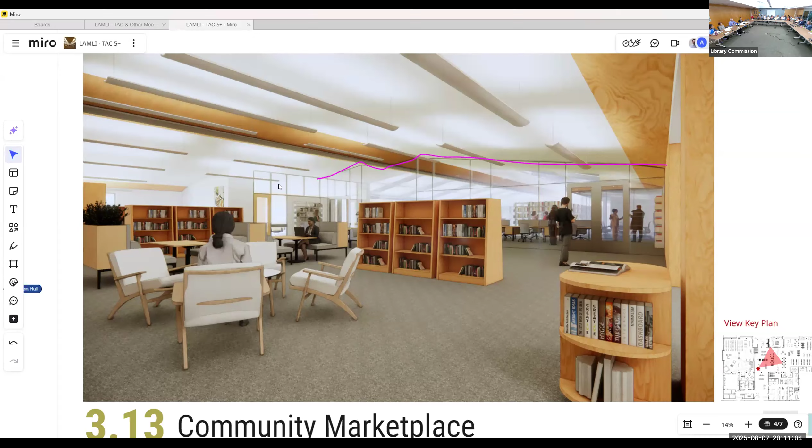A brief thank you on the washrooms - I'm going to be Canadian about this - but the washrooms are excellent. The main intent when we were doing this as a subcommittee, probably the thing I wanted more than anything, were those two bathrooms that outlet into the child's area, which we don't have today. Something of safety, we definitely need it, and I thank you for that.

With that, I think I'm just going to go through my notes. Workspace control - when you were talking about option 1 and option 2 in 2.4, were you talking about the boards you put up? Okay, I wasn't sure exactly what the reference was. I was reading it.

And I've asked about, are you planning a programmable space, the marketplace? I saw in your plans you want it to be programmable. I'm not even sure if this is the right question for you - it's probably more for something further on, for Rose and Steve, in terms of how we program it. But it will be programmable, I would imagine. I'll hand it off maybe to Steve.

So when you say programmable, you mean to be able to let it be accessible during after hours? Well, I want to run my author's event during reservable hours, space for the public. Yeah, so the public can still do their thing - that is our initial intention. Okay, so you could, not to hold you to it, but you could hold an event in the marketplace independent of the rest of the library, in that flexible space? Okay, thank you.

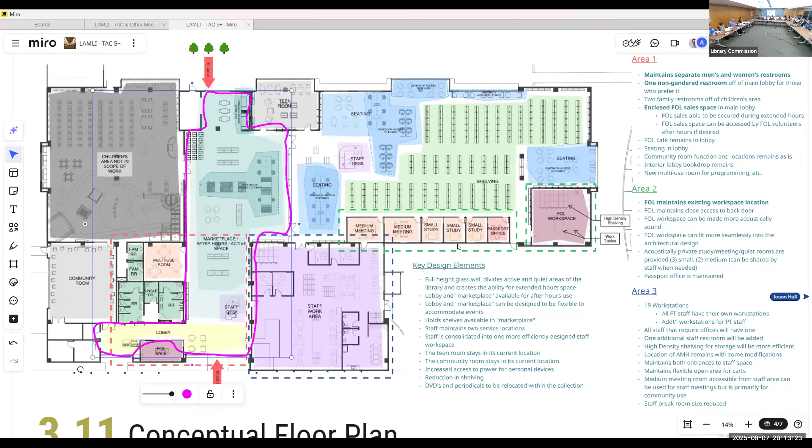Good question. So it will be acoustically treated so that the walls do not transmit the sound. Additionally, there's no noise-borne transmission through the mechanical vents and systems because it'll be separate from what's in the other room. There are lots of ways that we deal with that through acoustical consultants to actually make sure the calcs are there and it works. So yes. Okay, great, that's good.

Can I make one more comment then I'm done? No comments, questions only? Questions only. We got plenty of time to comment.